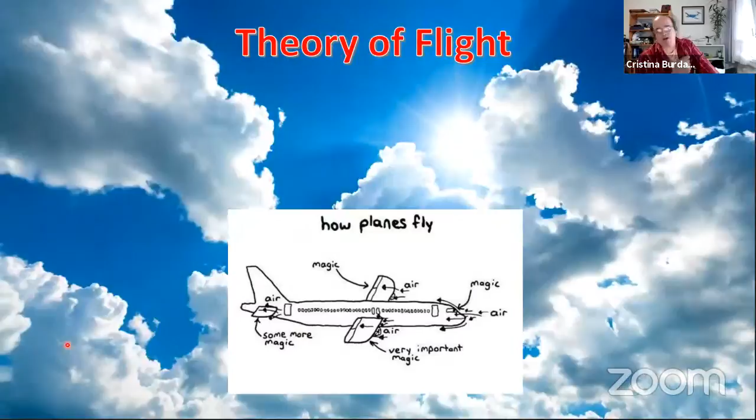Who am I? I work at Pilatus Aircraft Limited. I look after aircraft performance, from design, development, certification to operational support. But I'm obviously just one of many, many engineers.

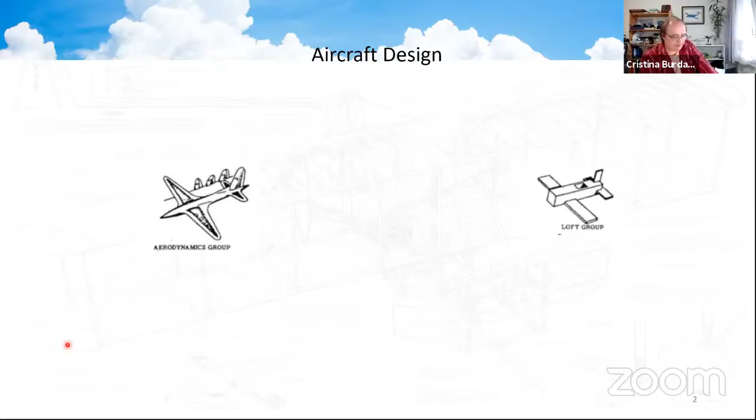In aerodynamics, we love our airplane to be sleek, smooth, rounded, so when it's offered to the air, it gets out the way and lets the airplane through. But when we give our drawings to the design group, they look at what they can draw and produce, and invariably it looks something a little different. When the stress group get involved to make the aircraft nice and strong, they obviously prefer something with iron girders, and you can imagine how this sort of builds up. If they have iron girders, it's all heavy, so we need to get the weight group in there to make things nice and light again. So we keep fighting with various groups - it's a cooperation, it's a very difficult birth. As you can see, the power plant group, they only think about one thing. So airplane design is a compromise.

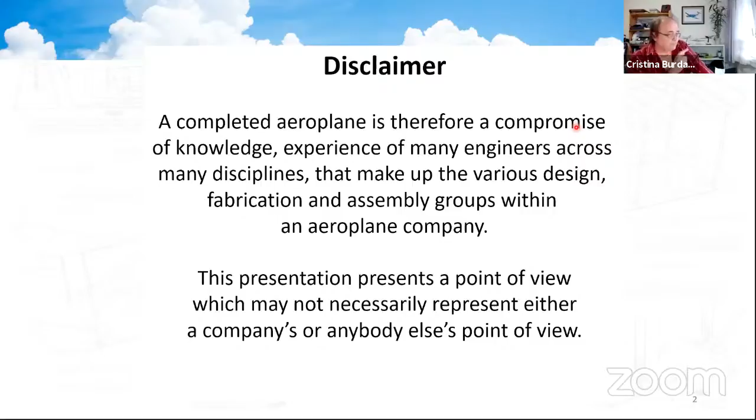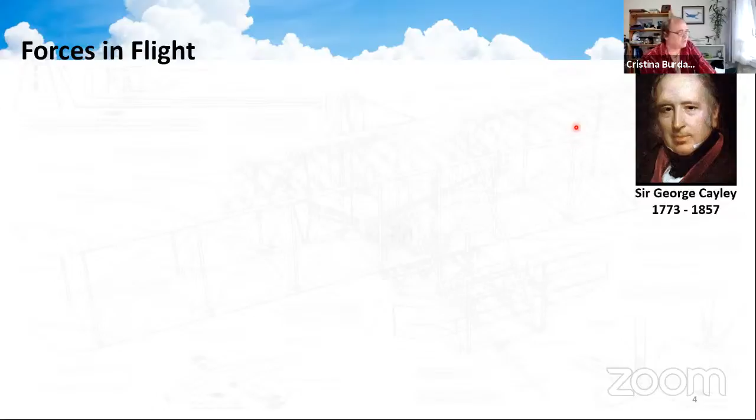So we're going to talk a bit about the science side. Where I'm going to start is on the subject of lift, but I'm going to touch on the historical part by starting on a grassy knoll in Yorkshire, where the landowner, one George Cayley, had been studying aviation for decades. He'd been studying many aspects of aviation, he loved watching birds and how things flew. And when he's about 80 years old, he came out with a design, this governable parachute.

This is circa 1853, in Scarborough, Yorkshire. And he was a bit old to get into this thing, so he volunteered his coachman, one John Appleby. And the reason he did that, at least the story I've heard, is that this glider was going to be pulled by a horse because he wanted to demonstrate the forces of flight. And it actually flew - it flew 900 feet. It crashed.

Mr. Appleby was given basically, this looks like a boat with spoke wheels and a tiller. This is actually the control to try and make this vehicle pitch up, pitch down, go left or go right. But I can imagine it offered him no control whatsoever. It crashed after 900 feet, but John Appleby, the coachman, survived.

By the time George Cayley managed to get over to speak to him, he had a great big grin on his face that this machine actually flew. The story is that John Appleby asked to be relieved of his services because he was actually hired as a coachman, not to fly.

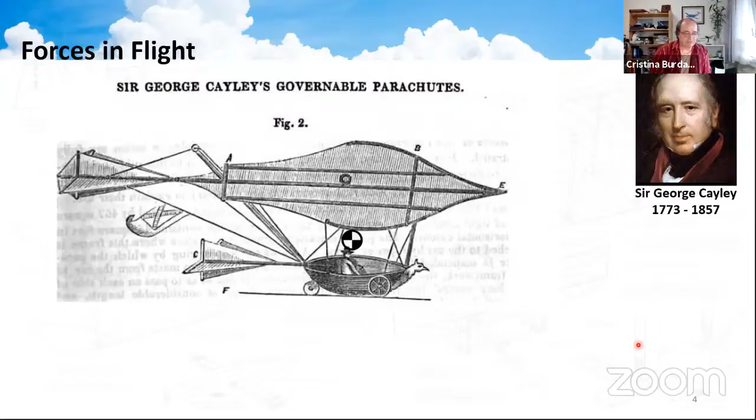Now, this is where the forces of flight come from. George Cayley determined that if the heavier-than-air machine had a center of gravity roughly where the person sits, it must have a weight acting down. Then, from Isaac Newton's theories, applying Newton's third law of motion, to every action must be an equal and opposite reaction, if this vehicle is to fly level, there must be a force called lift acting in the opposite direction.

For the non-physicists, Newton's third law is basically the one that says never kick a door, because a door will kick you back with equal and opposite force. The physicists will understand it as: to every action is an equal and opposite reaction. To generate the lift, the vehicle needed to move forward in the air, and there were some experiments George Cayley did on that, which I'll get to briefly.

But how was he going to do this? He was going to do it by using a galloping horse to drag this thing forward and give it some thrust. But again, applying Newton, there must be a force equal and opposite to that, which he called drag, which would prevent the aircraft from flying faster and faster or slower and slower. It would fly at the same speed.

And these are the forces that we use. This model is basically the core of my work, to tell you the honest truth.

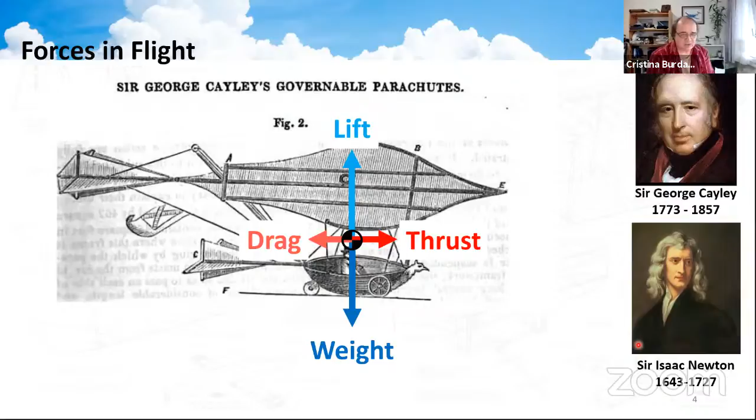Now, you might think this is a flight of fantasy, but now you guys are getting out of lockdown, try going up to the Yorkshire Air Museum, because there is a mock-up of this. It's not the original, because the original finished up in pieces, and they do fetch it out on a nice, fine day. You can read more about George Cayley on the historic-uk.com website.

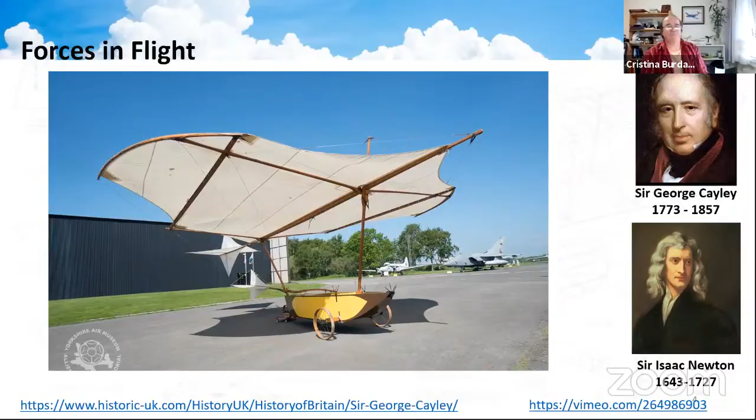So moving on, I want to take these forces and look what happens. If the vehicle took a second person on board, increasing the weight, then the lift must increase as well for the vehicle to stay straight and level.

But the thing you don't see is there is a connection between the lift and the drag. As lift increases, the drag must increase, that's the way it works. But if drag increases, you're going to have to increase the thrust. On an airplane, that means opening the taps, putting in more fuel, or a bigger engine, or both. But all that means is you would actually increase the weight.

And of course, that brings us back to the beginning. So it's a very difficult, very tender relationship. It's a love-hate thing that goes on.

But fortunately, this process is reversible. As your vehicle gets lighter, as you consume fuel, the aircraft will go faster. In fact, you probably have to finish up pulling back the throttle in some cases.

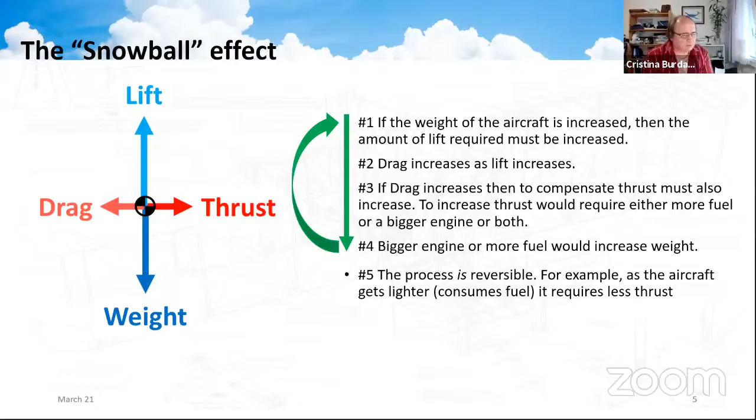Now, that's all okay, that's what lift is. But where does it come from? There are a number of theories I was taught, a number of theories where lift came from.

Now, when I was being taught this, I was thinking, well, how are the molecules connected? Is there a rubber band or something?

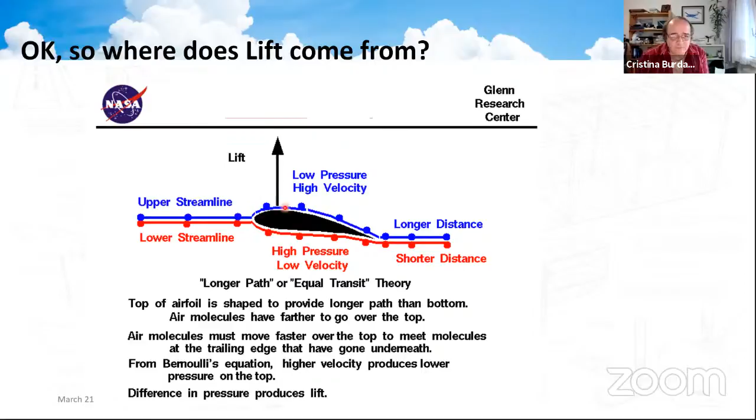This is a theory we were taught: because the air has to go a further distance on the upper surface, it travels with a higher velocity. The Swiss mathematician Daniel Bernoulli, from the very interesting Bernoulli family, realized and worked out that the higher the velocity, the lower the pressure. So on the upper surface you had higher velocity and lower pressure, while on the lower surface you had lower velocity and higher pressure, and the difference between the pressures provided the lift.

It is incorrect. Now why am I telling you this? Because I was forced to learn this at university as if it was gospel. This is incorrect theory number one, and there are several incorrect theories — I learned them all. I even have exam papers on them, and I don't know why I had to learn this.

Let's show you how this is wrong. I'm going to hand over to Professor Holger Babinsky at Cambridge University, who explains this very well.

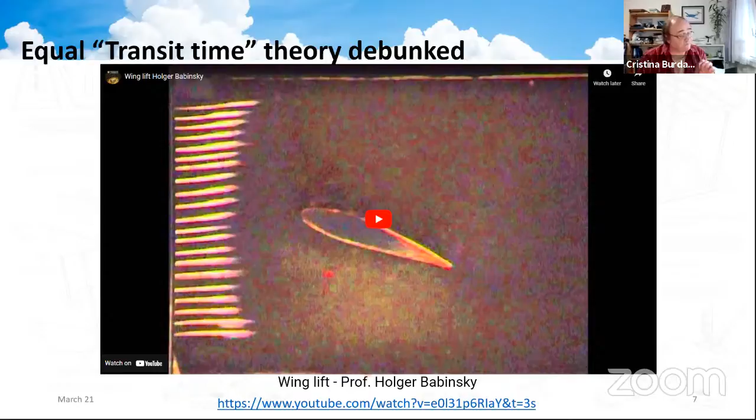It's often said that lift on a wing is generated because the flow moving over the top surface has a longer distance to travel and therefore needs to go faster. This common explanation is actually wrong. This video shows that the air on top does move faster, but it doesn't reach the end of the wing at the same time as the air along the bottom.

Here we use smoke to visualize the streamlines around an airfoil. We can pause the smoke by briefly interrupting the supply. This gives us lines that travel through the flow, as you can see here. If we now slow the video down, you can follow those lines, which gives an idea of how fast the flow is in different parts of the airflow.

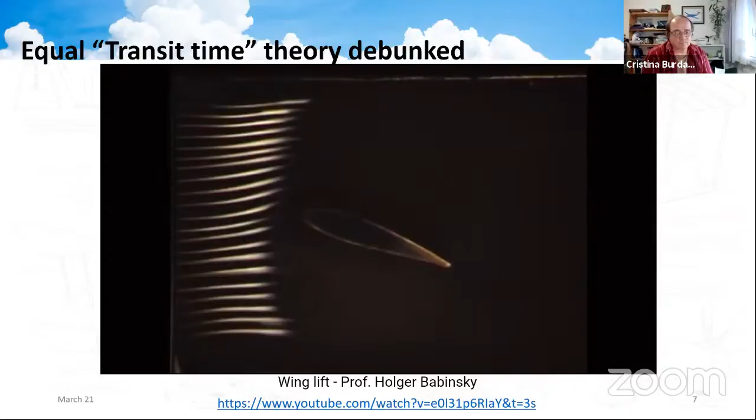You can see it speed up as it approaches the airfoil, moving faster over the top compared to the bottom. It reaches the end on the upper surface much earlier than on the lower surface. In fact, by the time it reaches the end on the lower surface, the flow has already gone a long way past on the upper surface. This shows very clearly that the flow doesn't take the same amount of time to reach the end of the wing.

Okay, so in fact it's even faster than that. That disproves the theory I was showing you before. As I said, these were theories I had to learn instead of learning how lift is really generated. I'm going to attempt to explain to you guys tonight, in about 3 minutes, how lift is generated. And if I fail, trust me, Professor Babinsky has more videos — it'll take about 20 minutes to explain it, but it is worth listening to.

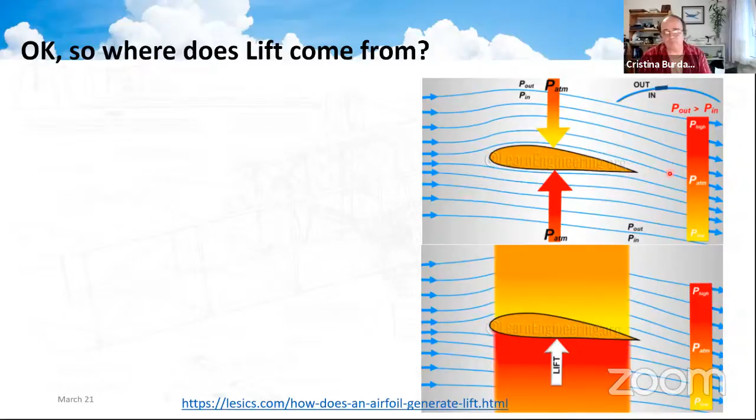If you recall, the flow around the airfoil causes the air — imagine these lines as smoke particles — to bend around the airfoil in a downwards fashion. Now if we look at this closer, as the particle of smoke moves along the arc, the pressure on the outer part of the arc must be greater than on the inner part. If it was the same, the particle would continue in a straight line, according to Newton.

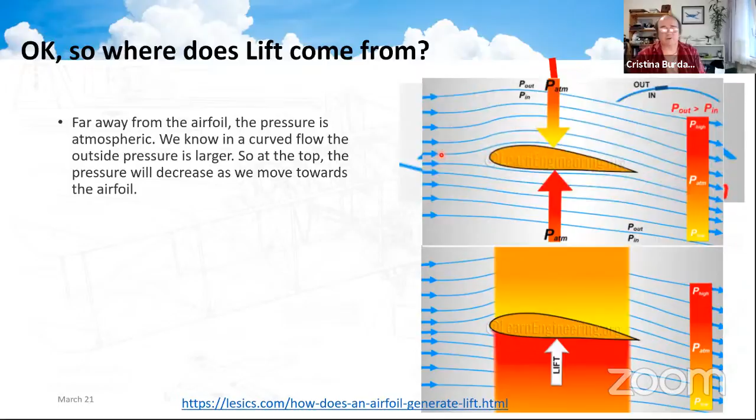And if the pressure on the inside was greater, the particle would actually deflect upwards. So we know the pressure on the outside of that arc must be greater than the pressure on the inside. If we imagine we're far enough away from the airfoil at the top that we're at ambient pressure, then each time we come in closer, we are reducing pressure — this pressure is greater than this pressure, which is greater than this pressure, and so on.

So on the upper surface of the wing, we actually have a lower pressure than atmospheric, and the opposite argument can be made for the lower side — you get a higher pressure than ambient there. So the lift is simply the difference between the pressures on the upper and lower surfaces. The incorrect theory you saw before has the right explanation for the pressure difference, but it arrived at it the wrong way.

And yes, you only get lift if the flow bends. If the flow doesn't bend, the only thing you're getting is drag. The flow will bend based on the speed of the flow and the shape of the objects in the flow, and that, in a nutshell, is where lift comes from.

Okay, so now I think I've given you enough on the physics side with regards to lift and the importance of weights. What I want to do is bring you bang up to date and start talking about emissions, because this is a very topical subject at the moment, and people are making some extraordinary claims, and we're going to be examining some of those claims.

So what are emissions? If you imagine jet fuel as a hydrocarbon, that's basically carbon and hydrogen atoms joined up in the molecule. From fossil fuel, we get a lot of impurities, and one of the main ones is sulfur. In the other end of the engine, we throw in nitrogen and oxygen, basically air. So out the back, you're expecting to see a combustion process which produces carbon dioxide, water, and sulfur dioxide from the impurities. But in fact, what we get are several other things.

We get oxides of nitrogen, oxides of sulfur. We get unburnt fuel - this is hydrocarbon which is unburnt fuel. We get carbon monoxide, and in some cases you can get black carbon, which is soot, but just carbon.

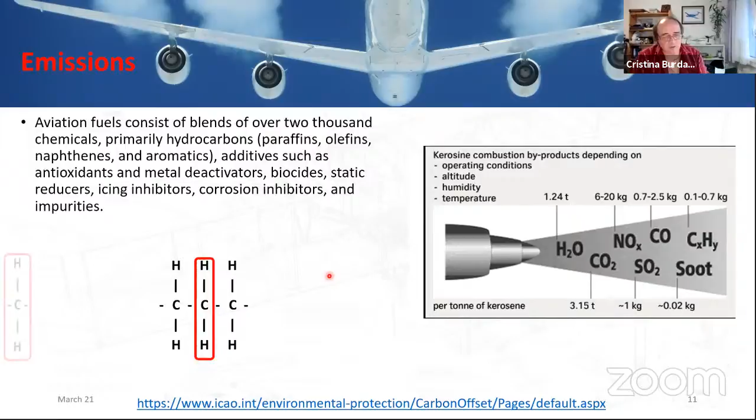I'm going to plonk that segment over there, and we're going to start looking at some molecular weights. So if I look at the hydrocarbon here, CH2, and add up the atomic weights, I'll finish up with 14 units. If I now look at replacing those hydrogen atoms with oxygen atoms, I'll finish up with 44 atomic mass units. And if I divide this 44 by the 14, I'll get 3.14, which is very close to this 3.15 value over here.

I do the same with the water, because the carbon here has the hydrogen detached, oxygen's gone there, and now the hydrogen will attach to oxygen, forming water. And I get similar values again - I get 1.28 compared to 1.24.

Now, anyone who does carbon offsetting will see a figure of 3.16 in the aviation world, maybe 3.15 elsewhere. This figure, 3.16, you multiply by the weight of fuel you are consuming, and that tells you the amount of carbon you need to offset. So if anyone looks into carbon offsetting and sees this number 3.16, it is not a made-up number - it has some chemistry behind it.

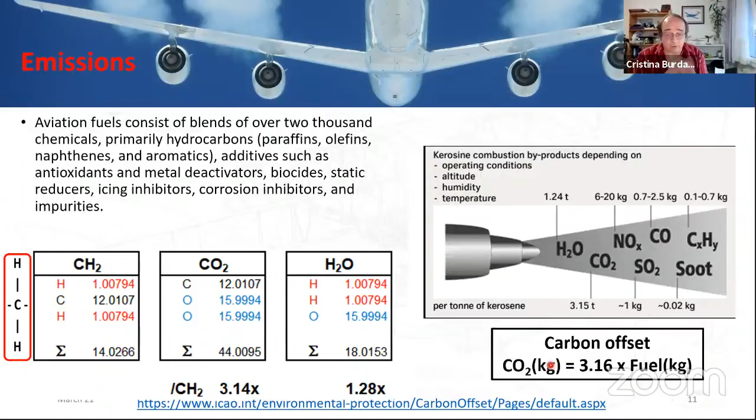I have oversimplified the thing tonight, but it gives you broadly a correct number. There could be some other influences in there - they may have considered adding factors like airports and the concrete involved. I honestly don't know, but 3.16 is the figure used in the aviation world.

Now I want to look at some of the minor emissions first. I say minor in a broad sense because they are things we still need to worry about. One of the other emissions was sulfur oxides - the X can represent 2, 4, whatever number. Sulfur is, as I said before, an impurity within the fossil fuel.

Sulfur dioxide can affect air quality, causing problems breathing. In the air, high up, it can combine with rain and form acid rain, attacking our ecosystems. I remember in my youth you could get sulfur-free fuel, but you had to pay more for it because of the extra process to take it out, and no one bought it. So I think they took it to heart and decided not to offer sulfur-free fuel anymore.

Nitrous oxide - oh, before I carry on, sulfur oxides can occur naturally, but usually only in things like volcanic activity.

Nitrous oxides - where does it come from? Nitrogen is normally quite an inert gas, but once you heat or set fire to something, it gets rather excited and will want to bond, formed by this combustion process. Nitrous oxides have huge influence on our ozone layer. In the upper atmosphere, towards the stratosphere, we want ozone layers because they block ultraviolet radiation.

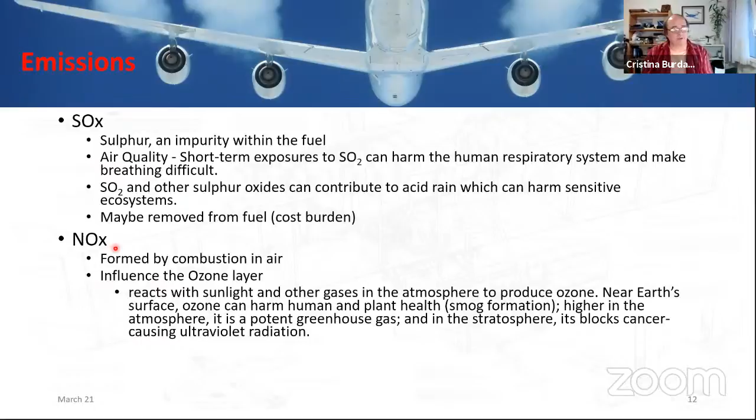The thing about nitrous oxide is it also gets formed naturally, through combustion - so it also gets formed in things like lightning flashes. Maybe Simon, our weather chap, can talk about this a little later. As far as I can tell, there's more than 1 billion lightning flashes across the planet in any given year, and you can see a lot of activity in various places. So a lot of nitrous oxide gets formed in the atmosphere naturally, but we are concerned about it as an output - it's one of the things we're heavily trying to avoid putting out in the aviation industry.

So approximately 2.4% of the carbon dioxide goes out into the atmosphere from transport related to aviation. I'm only talking about carbon dioxide mass - I'm not saying if you release it here it should be counted more significant, just basic mass at the moment. So about 2.4% of emissions comes from the aviation sector.

And what is sadly misunderstood is when you look at business aviation, it's only about 2% of civil aviation. So when people get upset about business aviation, they're actually getting upset about a figure of less than 0.05% of global CO2. Frankly, I think there are some bigger things that need to be addressed. But I do have a biased opinion because I work in business aviation.

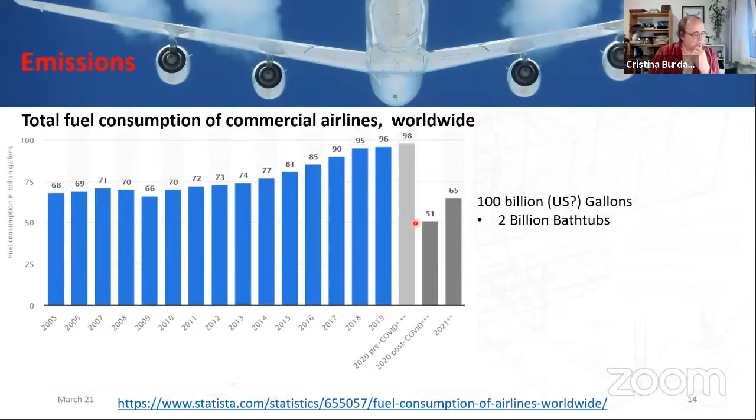I want to focus on the 100 billion gallons. What does 100 billion US gallons look like? Well, that's 2 billion bathtubs, but that's still too big a number for me. What else could that look like? Over 151,000 Olympic-sized swimming pools. Hounsdale doesn't have an Olympic-sized swimming pool. What else does that look like? 86 Chasewater reservoirs going up every year, or six and a bit Lake Vyrnwys.

Now, if you accept what I was saying before, that aviation is 2.4% of global CO2, then what we're putting into the planet is 3,585 Chasewater reservoirs worth of fuel, or 264 Lake Vyrnwys. So when people argue to me, oh, how arrogant is man that they think they can influence the climate, I struggle, because I don't see how we can't be affecting the climate. And remember, this is one year's worth of carbon dioxide we're pumping out. We've been filling the planet since the Industrial Revolution, 250 years ago. And yeah, it's huge. So what are we going to be doing about it?

Okay, so I want to introduce you to an organization called ICAO, the International Civil Aviation Organization. They are the United Nations of the aviation world. They set out global policies, global mandates, and each local authority, like in the UK you have the Civil Aviation Authority, and in Switzerland we have the Bundesamt für Zivilluftfahrt, or BAZL, each body can define higher standards than what is defined at international level, should they so desire.

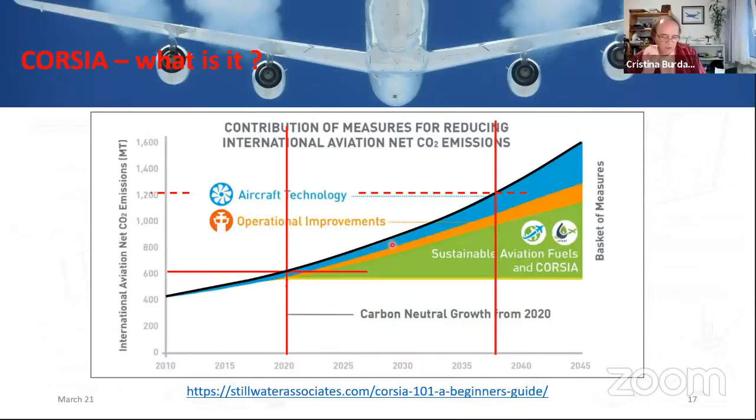Well, what the aviation sector said was they want to do carbon neutral growth. How are they going to achieve carbon neutral growth? They're going to use a basket of measures. In that basket of measures, we've got aircraft technology. We're going to be trying to make the aircraft lighter, you saw the importance of weight earlier. We're going to be trying to improve engines. As you saw, we have unburnt fuel that's managing to get through the system. We're going to try and improve how the fuel is consumed. We're going to try and make the aircraft cleaner.

So aircraft technology, we're hitting this every time. We're always trying to improve, but we were always trying to anyhow. But now we have more emphasis. And if you go back to the disclaimer I had at the beginning, where we have this set theory where we could put all the engineering teams in, what happened was on the right we had the loft group, production group. If you want to make your airplane cheaper, you push the scale that way. But if you want to make your aircraft more efficient, you push it back the other way towards me, in aerodynamics. That's one part of our basket of measures. Operational improvements.

I don't know if you remember, but there used to be a time when you'd be in the airplane waiting to take off, and when you arrived at your destination you could be put in a hold. That doesn't happen anymore. Now when you go to take off, there's only 2 or 3 airplanes in front of you, not 10 or 20 like there used to be. You can only take off if you've got clearance to land, so you don't hold at the destination anymore.

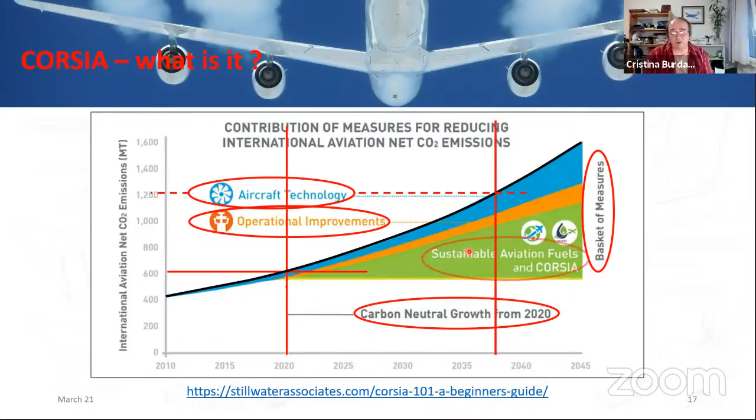But there's another quite interesting way of getting sustainable fuel. Let's listen to what's going on here, because this is the source of where this presentation started.

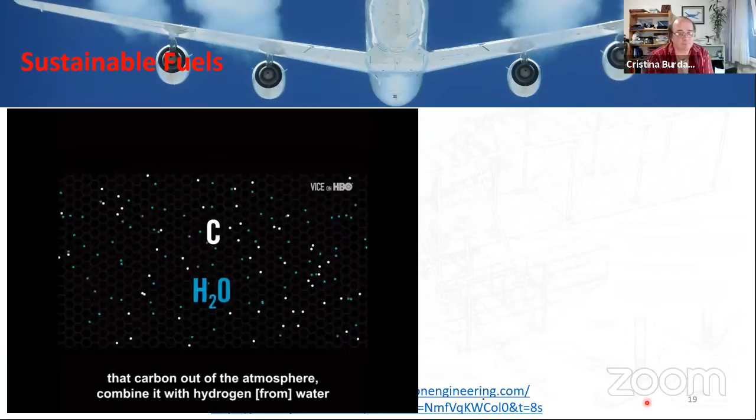Why don't we recycle energy? You're hitting the nail on the head. We would like people to be recycling their fuel in the same way as they recycle other things. Our technology refines that energy, that carbon out of the atmosphere, and combines it with hydrogen from water. And then that's the same as gas or jet fuel? Yeah, it's chemically the same, no pollutants. For example, our diesel burns completely clean, none of that black smoke you see from trucks going up hills. Completely clean, but yeah, it's chemically identical.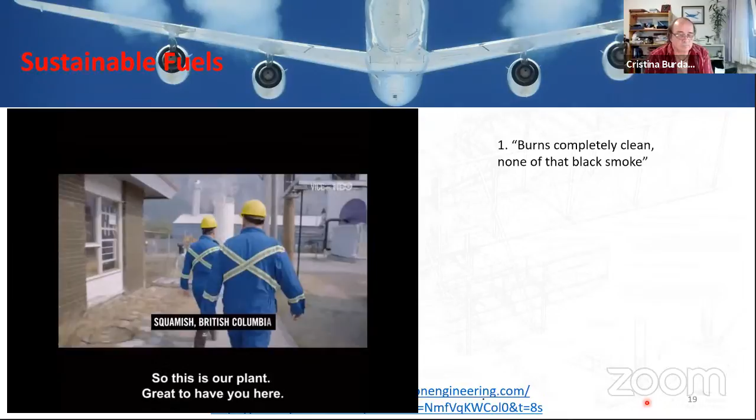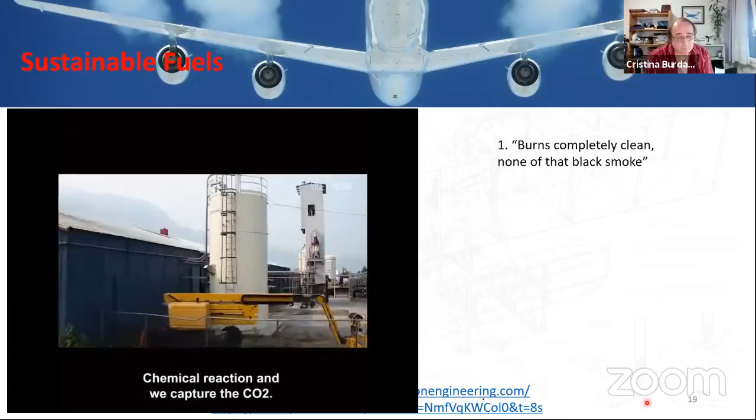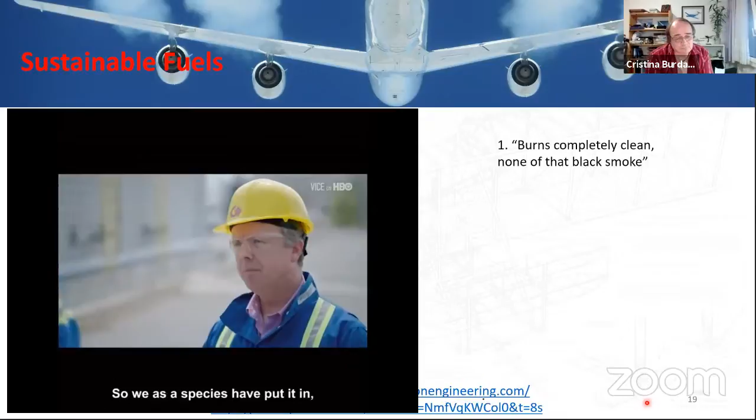So this is our plant. Great to have you here. Everything here is a working model, full process working, and we're capturing CO2 from the atmosphere right here. Think of it as a big cooling tower - a large fan draws the CO2 in, there's a chemical reaction, and we capture the CO2. Wouldn't there be more carbon to capture near dirty, naughty factories? No, it's uniformly distributed. We could put one of these plants in the middle of Beijing, or we could put it in the middle of the Sahara Desert - you'd capture the same amount of atmospheric CO2. So we as a species put it in, so we as a species should be taking it out. Well, that's our choice, but I think we have to, or find somewhere else to live.

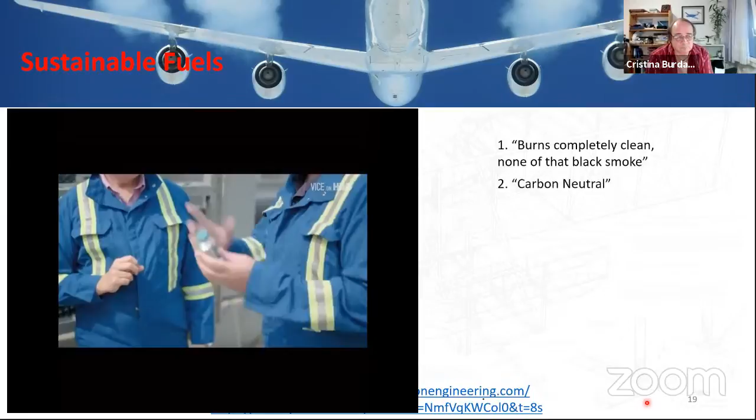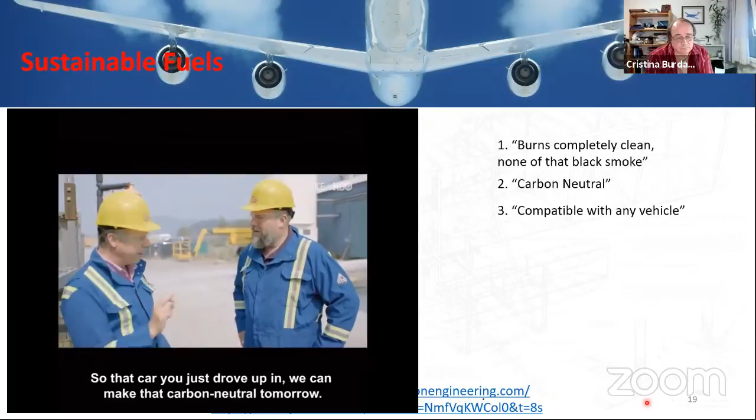This is the fuel that we make. It looks exactly the same as any other fuel. It's very, very high chemical performance - higher performance than the stuff you buy at the pumps today. So it's better than the pumps, it's carbon neutral, and theoretically it would be cheap to make because you're refining the energy that's already out there in the atmosphere. Yeah, you're using the CO2 from the atmosphere. Your only feedstock, the only thing you're consuming, is renewable electricity. But here's the interesting thing - a carbon neutral fuel that's compatible with any vehicle in the world today. So that car you just drove up in, we can make that carbon neutral tomorrow.

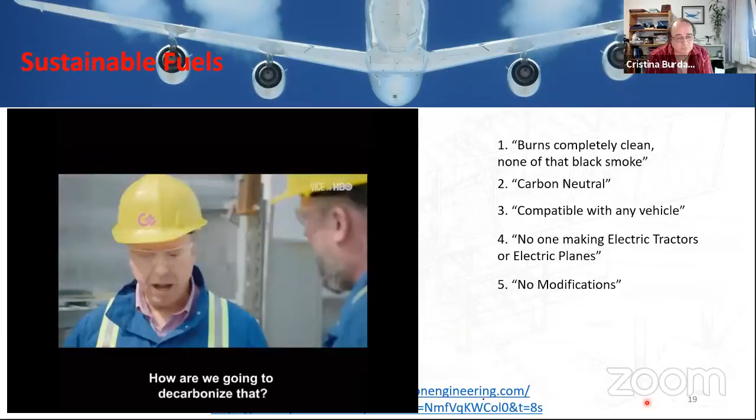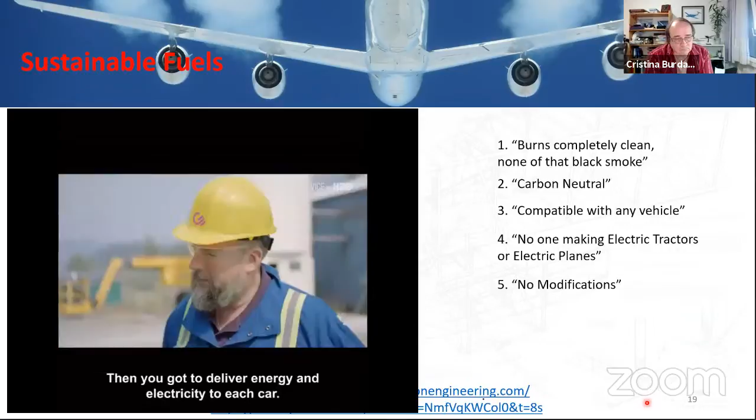Any vehicle, any performance vehicle, any battered old truck, aeroplanes - we're compatible with all of those. Which is significant, because nobody's making electric tractors or electric planes. Do you have to do any modifications? No. Transportation is about 20% of CO2 emissions - how are we going to decarbonize that? There's 1 billion cars in the world, so if we all go electric at $50,000 per car, that's $50 trillion, and then you've got to deliver energy and electricity to each car. It's a massive change. Alternatively, why don't we just change the fuel? The price to you at the pump will be the same.

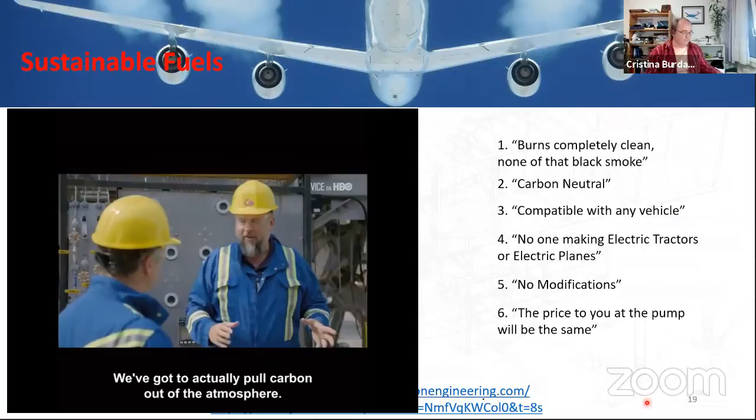Having something like a carbon neutral gas isn't even enough - we've got to start going negative, we've got to actually pull carbon out of the atmosphere. Now, can this do that? And what's the plan there?

Take the CO2 generated here and bury that underground, and you get to negative emissions. Right, it's a hugely important thing.

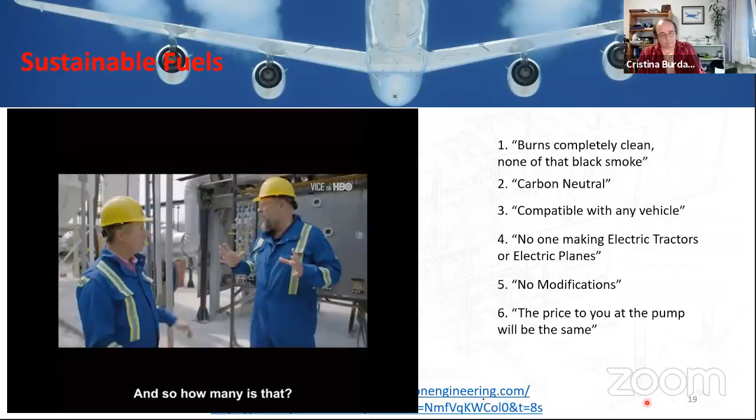How many do you need to scale it to get to carbon negative? You need less of these than there are power stations in the world today to net emissions out to zero. And how many is that? It's in the region of tens of thousands. If we are taking measures as we should be to remove emissions elsewhere, now you start getting to an overall negative emissions from the world.

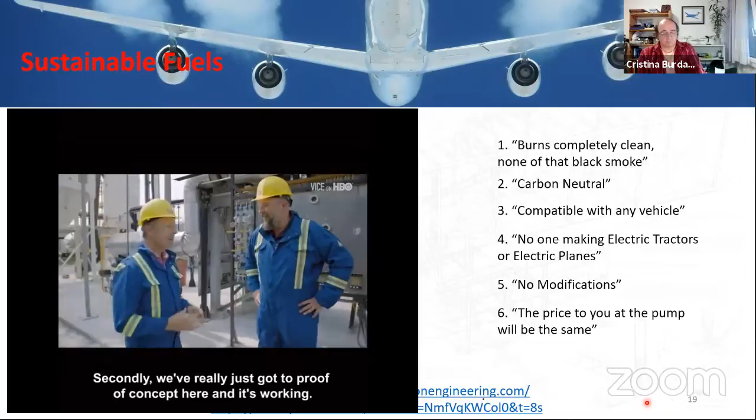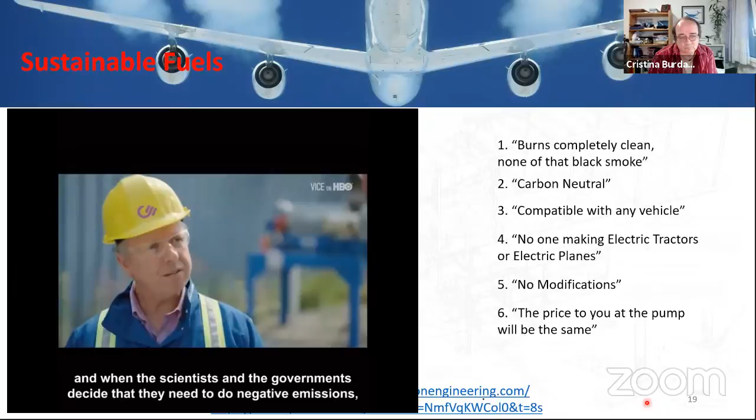Why isn't the world rushing to Squamish, BC and saying, can we please make 100,000 of these? So first of all, we're open and ready to receive the world. Secondly, we've really just got proof of concept here, and it's working. So the next step for our business is to expand across the globe, make carbon neutral fuel, and when the scientists and the governments decide that they need to do negative emissions, the technology is ready.

Okay, so that all sounds really quite exciting, and I picked up on a few things I'd like to discuss. So let's go through some of these things.

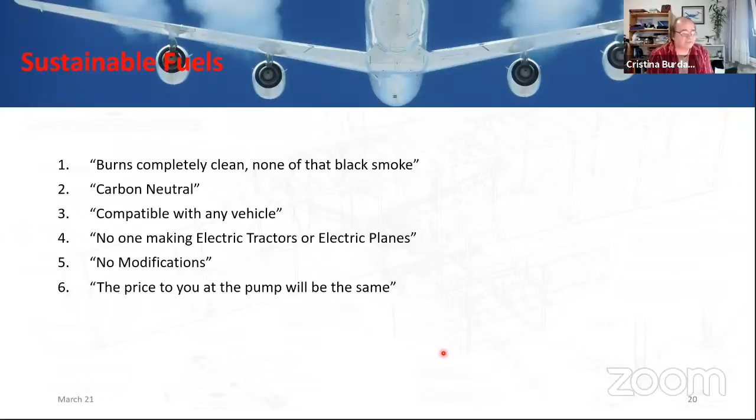Burns completely clean - well, if I remember right, normally if a truck's burning black smoke, it's usually that the fuel is not burned properly or it's injector performance. This fuel will not solve fuel injector issues. It will burn differently, so it may not be as black, and it hasn't got in this fuel the impurities we have in fossil fuel.

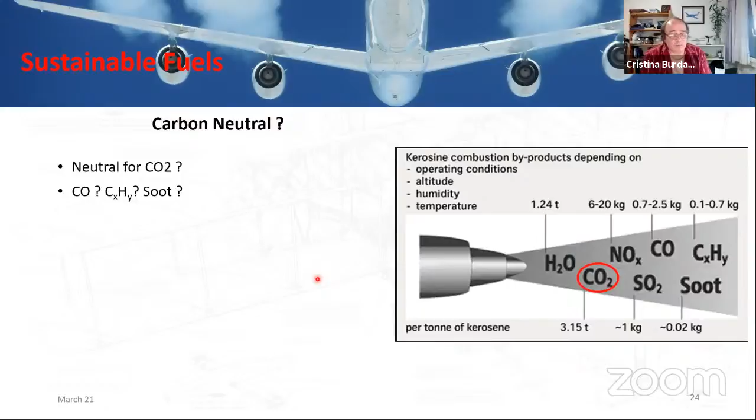Carbon neutral - well, neutral for carbon dioxide, yes. But if you remember, we had other carbon sources - we had carbon monoxide, unburned fuel, and soot. So he's neutral for CO2, and CO2 is the biggest contributor. The other ones are less so, considerably less so. But again, if he wants to claim carbon neutral, I'm a little hazy because there's bits and pieces of other carbon which aren't being taken out.

Compatible with any vehicle, as long as it meets the fuel standards of that vehicle - absolutely. And here I'm in full agreement with what it's doing.

No one makes electric tractors or electric planes - well, that's an interesting one. Electric tractors, you can buy them today, you don't even need to sit in them. I don't know when these tractors were available, and I don't know when Steve made his claim, but there are electric tractors out there doing some fantastic stuff.

Electric planes, that's an interesting one. So let's have a look at electric planes - I'll get to the chart in a moment, but let's have a look what we've got. This is from Zunum. They had investment money from Boeing, but Boeing have run into trouble and pulled the plug. Zunum, at the moment, I don't know where they're going, what they're doing, and so that project at the moment is on pause.

This project over here, Alice, is an Israeli product. They had an unfortunate incident with their first prototype - no one was hurt - and the second prototype, I believe, is either about to fly or is flying. They're pushing ahead, it's looking interesting, but as an aerodynamicist, I do worry about the position of some of their engines.

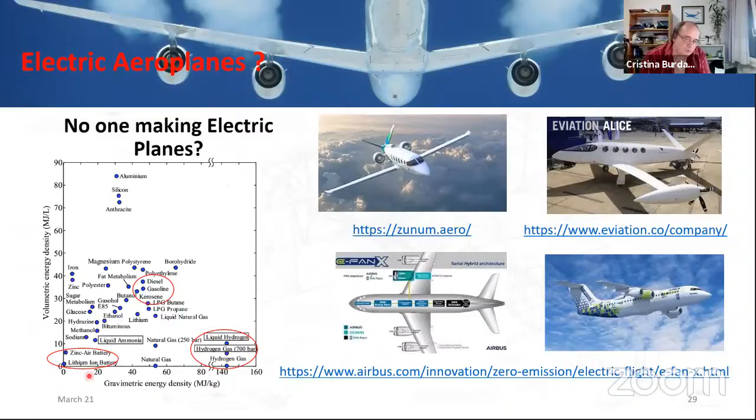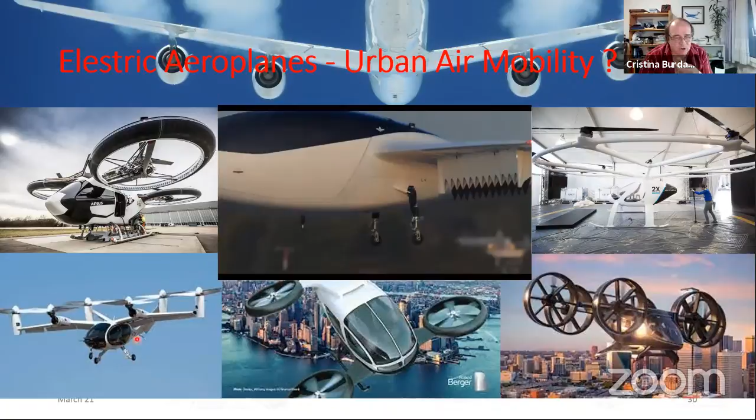And the thing is, there's quite a proliferation of these. There's actually more than 10, so it's probably approaching about 100 different designs of urban air mobility, and they're all working with electricity. But when you get to your destination, what are you going to do? Are you going to wait the next day to charge the batteries? Are you going to swap the batteries out?

It doesn't, to me, make sense as a business case. The air vehicle needs to be out there working as much as possible to earn its keep. So when it comes to electric aeroplanes, I have to agree 100% with the claim that Steve made. No one's making it work. They're trying, but it's not working.

Electric tractors, no, they're there. No modifications to your vehicle, absolutely. And this is like the Holy Grail. It's a drop-in, you may hear the term drop-in solution. And then the price at the pump needs to be the same.

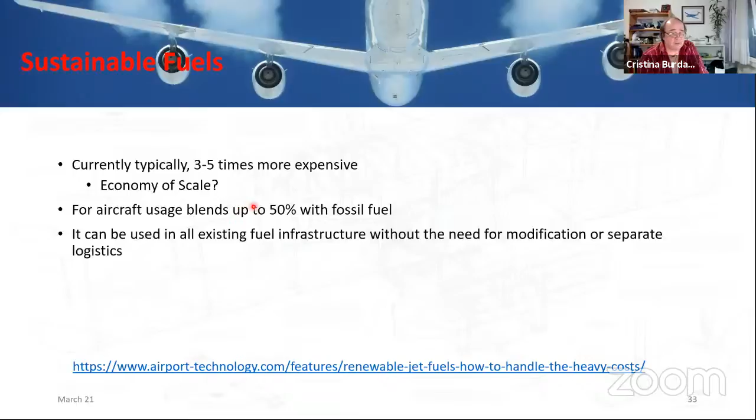Well, this isn't Steve's direct air capture, this is using the biostock. But currently they're 3 to 5 times more expensive. And we do blend them, which will help bring the price down a little bit. But at the moment, sustainable aviation fuel is not a big thing. It may come down with economy of scale.

There's companies such as Gulfstream who have been operating for over 3 years. They've done 550 flights, flown 1 million miles on sustainable aviation fuel. We need to prove that the fuel is not eating the tank, it's not eating the fuel system, it's not eating the engine, that it works. So we need to get a degree of reliability measurements into this.

So that's my take on what Steve's been talking about. The interesting thing on direct air capture, though, is he will go to, or can take air carbon dioxide out of the atmosphere and bury it.

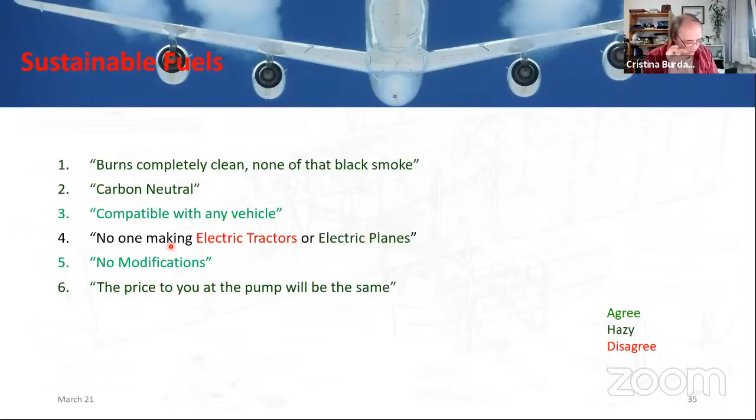Now, ICAO, the other thing after sustainable aviation fuels was CORSIA. CORSIA is Carbon Offsetting and Reduction Scheme for International Aviation. It's in the pilot phase at the moment, and will probably be introduced in the next 3 to 4 years. This means carbon credits, and carbon credits can be things like green projects, whether you invest into sustainable forest management, reclaim forestry, or invest into renewable energy projects.

So there will be carbon markets, and you'll be encouraged to invest in them. However, there is no managed, monitored, accredited system today.

And in 2007, some chap in Hungary, well, I don't know where he was, not necessarily in Hungary, offered carbon offsetting for the Vatican in 2007. And he gave them a certificate. But the forest he said he was going to reclaim, which was in Hungary, never happened. And you can imagine how happy the Vatican are about that. The Vatican weren't paying anything. This guy was just trying to get them on board to then advertise he's got God on his side.

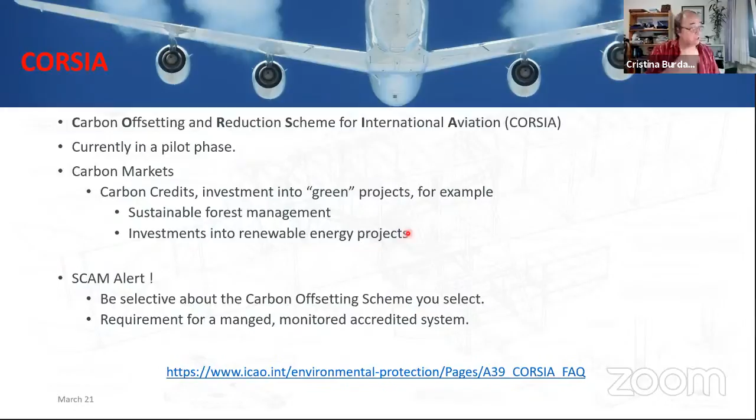Now, batteries, what alternative energy sources can we have apart from the fuel? We talked about batteries.

There's been demonstration flights around the planet. Here is a small aircraft that is certified and flying on batteries. In fact, it flies for about 15 minutes, including reserves.

That's fantastic, but for larger scale aircraft it doesn't work because batteries just do not have the energy that we need. It's about 40 times less than jet fuel. And then what are you going to do? Normally the airplane gets turned around within the next hour or so for the return trip. You can't lose time charging batteries, and you probably don't want to swap out the batteries.

The technology isn't there today, but that doesn't mean the technology won't be there tomorrow. I do know they're working on, I believe it's called sulfur iron, which is a promising step forward. But they've got to do more than an order of magnitude improvement, and it's a hell of an ask.

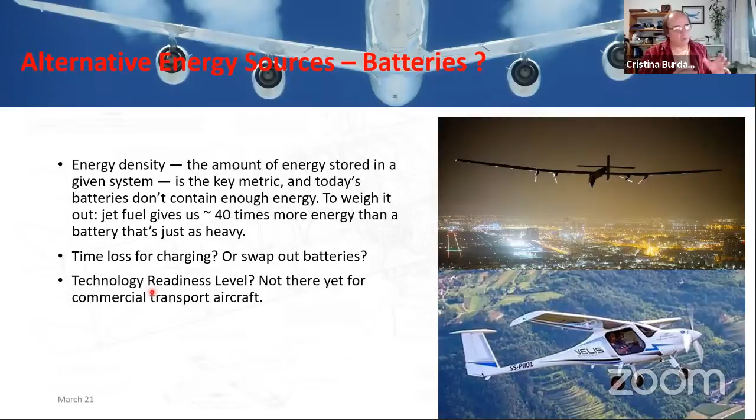So if we can't do batteries, if we can't store electricity on board, what about if we create electricity on board? Fuel cells. In fact, there's been a couple of fuel cell aircraft already. Boeing Phantom Works have created an aircraft which they flew a few times, and recently in Cranfield, Zero Avia have been testing their aircraft.

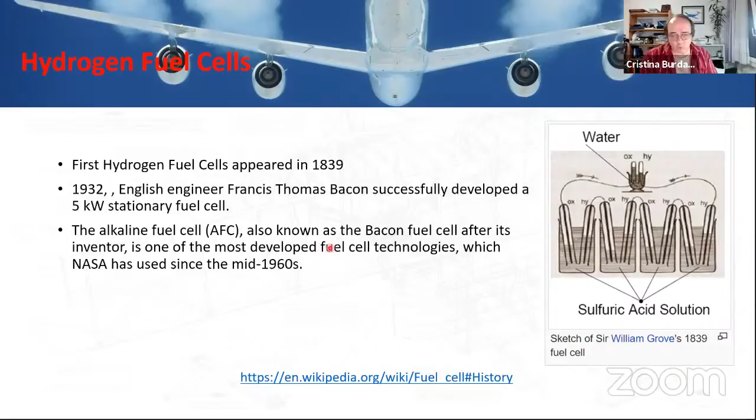Hydrogen fuel cells have been around a long time, since 1839. In fact, hydrogen fuel cells in the 60s have been to the moon and back. So it's not a new technology, but to get the energy out for the weight that they will be is a difficult thing. How do hydrogen fuel cells work? There's a very short presentation on that.

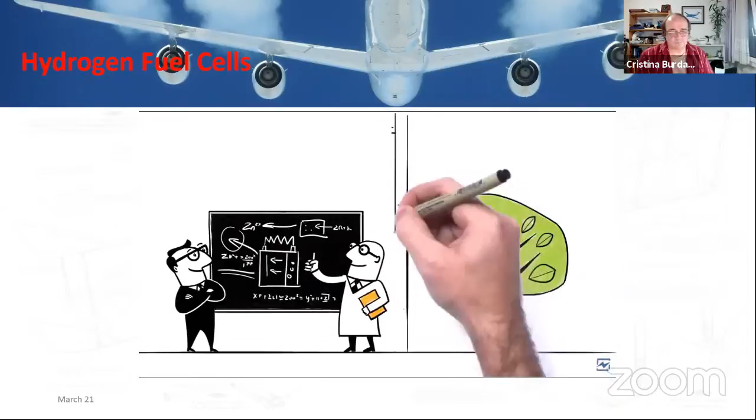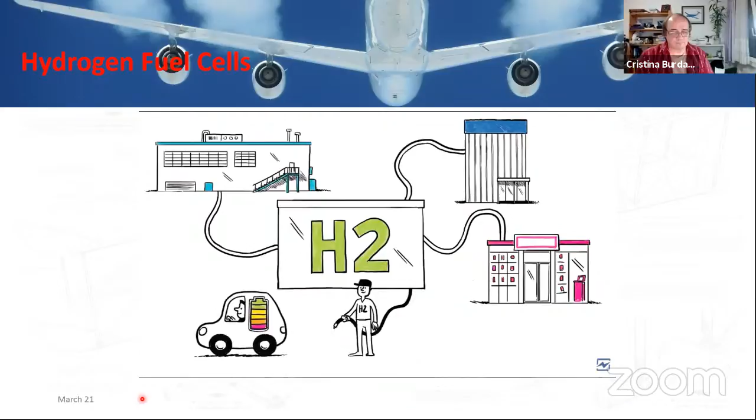Have you heard about the new sustainable energy technology called fuel cells? In fact, they're really not that new. Fuel cells were invented in 1839 by William Grove, and were developed by Pratt & Whitney and other companies in the 1950s. Safe and dependable, they were used by NASA and the Russian space program to power spacecraft. Today, leading global companies like Apple, Verizon, and Coca-Cola use fuel cells to generate clean power. Honda, Toyota, and other car companies use them to power their new generation of pollution-free cars. So how do fuel cells work? Fuel cells use hydrogen and oxygen in a chemical process to produce electricity and heat. The only byproduct: pure, clean water.

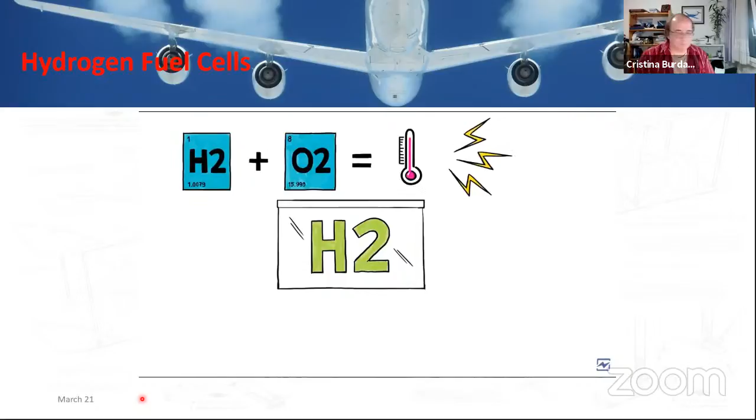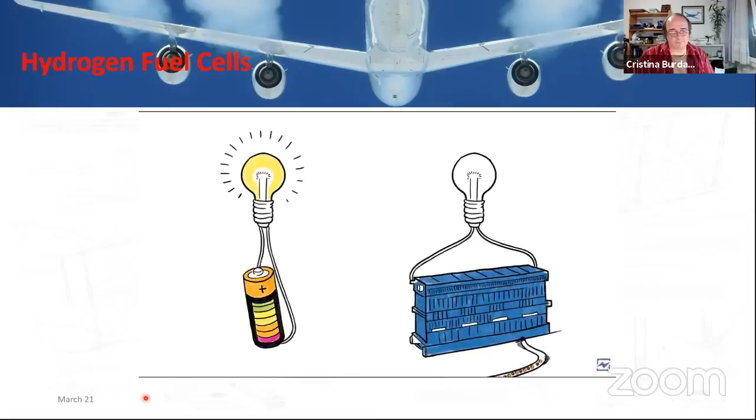A fuel cell has two electrodes, an anode and a cathode, and between them an electrolyte. The catalyst on the electrode breaks the H2 hydrogen molecules to allow them to combine with hydroxide, OH negative ions, to create water and release electricity. But unlike batteries, fuel cells don't store power for a limited amount of time. They generate it for as long as you have hydrogen.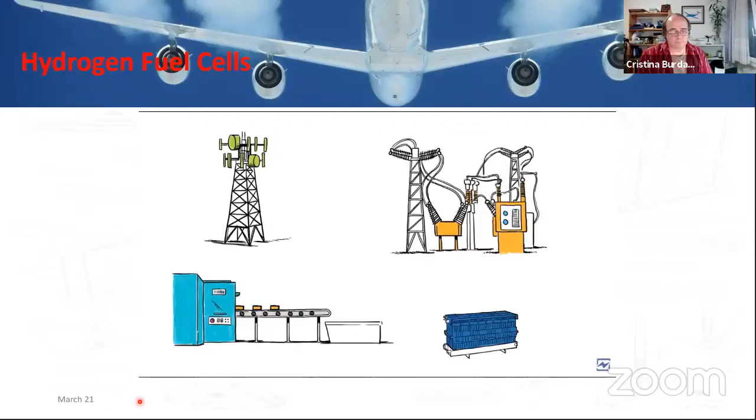As a source of backup power, fuel cells are much better than diesel generators. They aren't smelly or noisy, and they don't produce harmful exhaust. Fuel cells can be used anywhere you need backup power: mobile phone towers, electrical substations, manufacturing, and much, much more. Other green power solutions harness the sun or wind, but if you're caught up in a cloudy day or on days where the air stands still, these solutions can leave you without enough power when you actually need it.

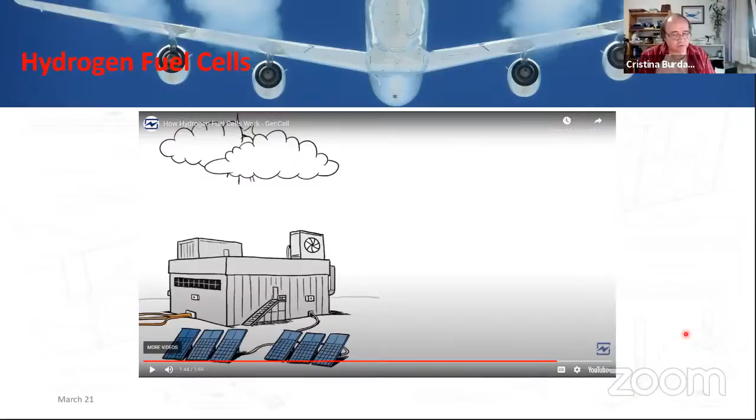That's why you... I'll pause there. He's about to advertise GenCell, but I know my time's running out on me. So that explains briefly how hydrogen fuel cells work.

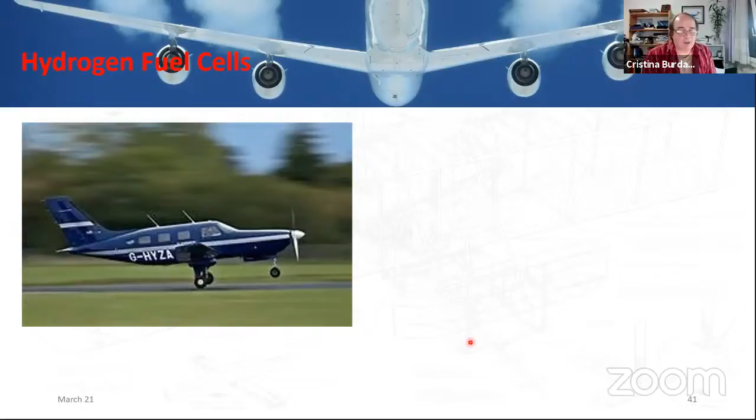And as I say, there's an aircraft that's been flying, and it's actually now starting to look at a nice sized aeroplane, a business class aircraft, with 250 kilowatts of total power, about 300 horsepower, just over 300 horsepower. And it's flying down in Cranfield, or I should say, was flying down in Cranfield.

Just less than a month ago, they made a statement that their aircraft made a safe off-airport landing in a field just outside of the Bedfordshire airport. I'm not too sure normally what I would expect to see, but this is what a safe off-airport landing looks like.

The crew were absolutely fine. They were battered, but they walked away from this. The hydrogen was secured — you can see there's no burning or anything there. It may have been to the moon and back, but apparently it can't do a lap of Cranfield Airport.

Fortunately, these guys aren't deterred, and they are going to push on with the next aeroplane, because they had a family of airplanes they're going to work along. I look forward to seeing the work from ZeroAvia on this project.

That said, I do love the understatement said there. Recently SpaceX lost Starship serial number 10 on the pad. It landed, and after a few moments, it exploded. But of course, SpaceX won't say it exploded - they claimed it underwent a rapid, unscheduled disassembly. And they do mean rapid. I love my business because we actually do enjoy understatements.

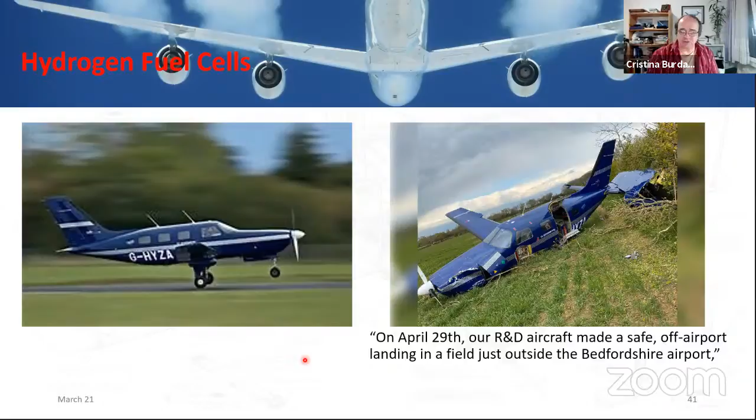So, okay, what about hydrogen itself? This is why Airbus have stopped doing, or abandoned, their EFAN X program, the electric airplane we're looking at. And Pipistrel, who made that other airplane I showed you earlier, which is already certified as a battery-powered airplane, are looking to get into this market.

Hydrogen has already been tried, back in the 1950s. This, though it says it's a B-57, any aviation buffs out there will realise it's an English Electric Canberra. What they did was make no modifications to the engine, but they shut down that engine and fed it hydrogen, which they did. They had some problems at first, but eventually got it to work. The one engine running on jet fuel produced no contrails, no condensation trail behind the airplane, while the one working with hydrogen produced an enormous, dense and persistent condensation trail. And if you're in the military and you're announcing your arrival like that, who needs radar?

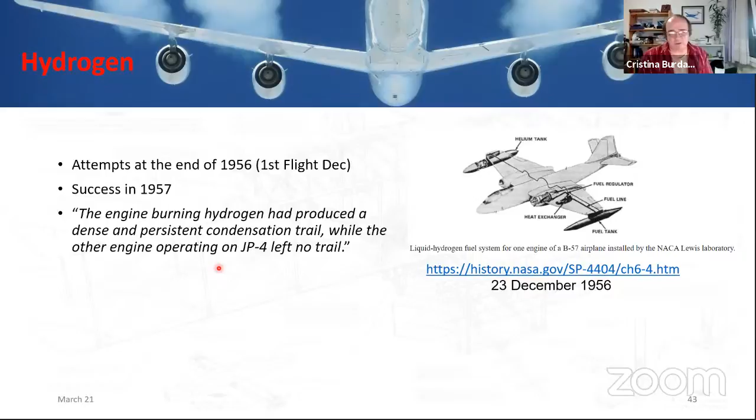So the project got shelved quite early. The Russians actually looked at it too in a passenger aircraft, but that was back in the 70s, I think. I must admit I don't remember exactly what happened there and why they abandoned it.

What's so special about hydrogen? I've pinched this from an Airbus presentation from 1999, and we're looking at liquid hydrogen. For the same energy content, for the same energy by weight, I need 3 times less liquid hydrogen. But by volume, I need 4 times more liquid hydrogen than jet fuel, and I need to find somewhere to put it on the airplane. And we're talking liquid hydrogen, so I've got to put it at minus 253 degrees centigrade.

Bit of a challenge. Again, let's see what happens with an identical energy content. You're burning 1 kilo of kerosene, and you remember these numbers from before: 1.2 and a bit kilos of water, 3 and a bit kilos of carbon dioxide. For the same energy, you only need 0.36 kilos of hydrogen. There's no carbon dioxide output, there's no soot output, but we're producing 2.5 times more water, and because hydrogen burns hotter than kerosene, we're going to be producing more nitrogen oxides. And that is of concern in this business.

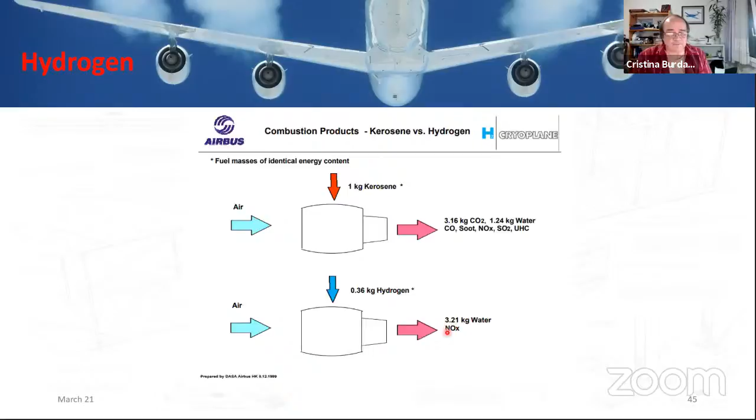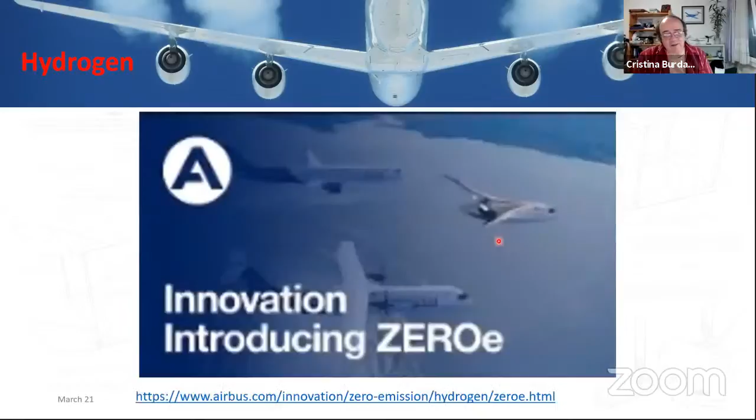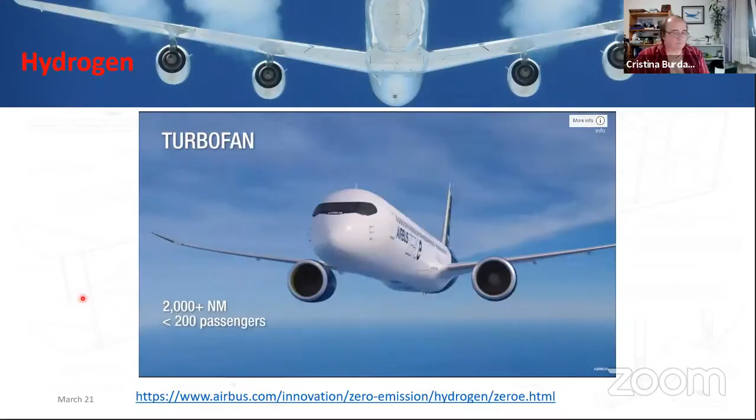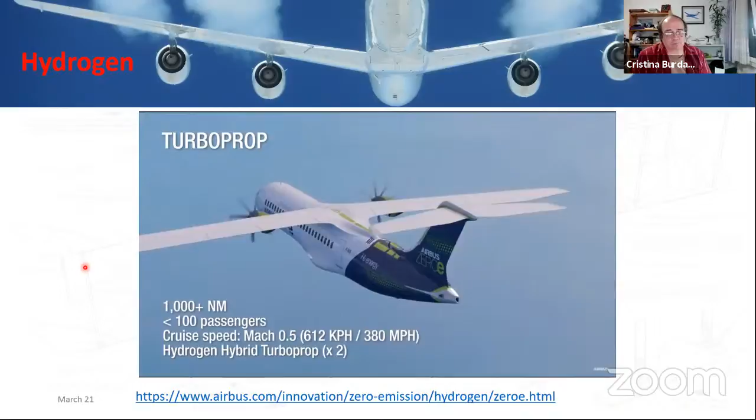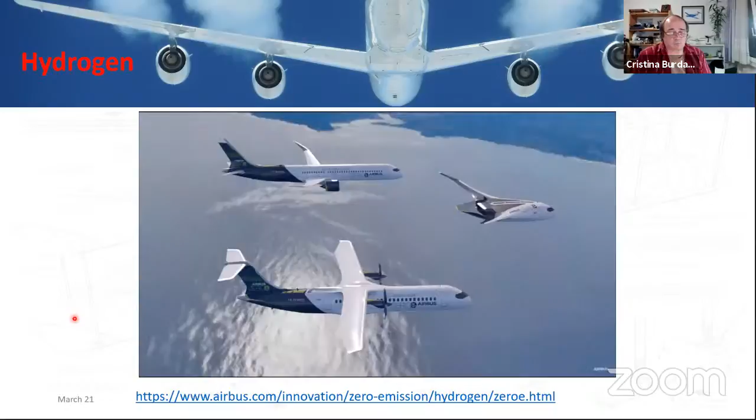Let's have a look at what Airbus think today. Airbus are now saying we can do hydrogen, or we pursue hydrogen aircraft. It's a hydrogen hybrid - what that means exactly, I don't know. They're going to be mixing the hydrogen with other alternative sources, maybe hydrogen fuel cells and so on. But in that presentation, they talked about ranges of 1,000 plus and 2,000 plus nautical miles.

You still can't get to places like Dubai, not that I've ever been, and you're certainly not getting to places like Australia. These are the kind of ranges they're talking about with these aircraft.

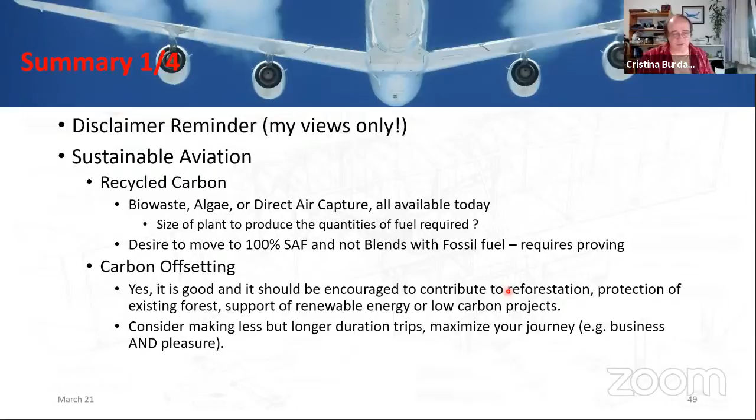Hydrogen, we looked at hydrogen. The problem with hydrogen is the nitrous oxides. Maybe that could be offset by burning in oxygen instead of air, because you're getting the oxygen from the hydrolysis, and then you're not burning it in air and not getting the nitrous oxide. But then you're going to be carrying more oxygen bottles and it's all weight issues. I just don't see it working. I don't know how they're going to solve the nitrous oxide issues. Plus hydrogen contrails have about 2.5 times more water.

Clouds and global warming - maybe Simon can say something about this a little later. Clouds, they can trap the heat and warm - this is one thing we all know about. But we also know they can provide cooling to the planet. It's a love-hate relationship with clouds and contrails.

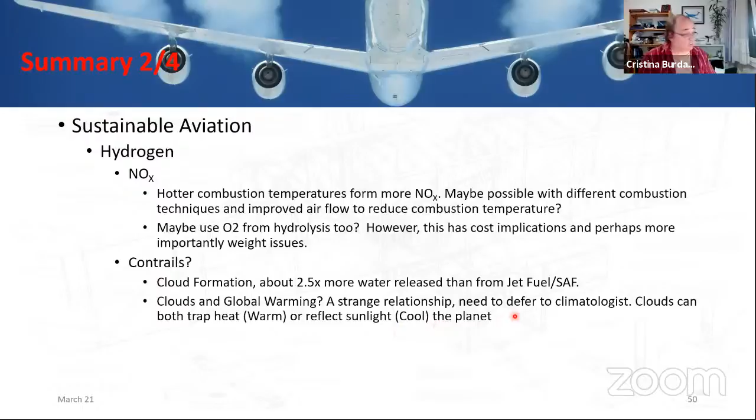And you've seen the range implications earlier, so batteries alone, we know just doesn't work. Maybe for small aircraft, like Simon flies around in at Halfpenny Green or whatever it's called these days, going to the business airport - fuel cells and batteries for larger general aviation aircraft, that's something I think may come, and I hope ZeroAvia pick themselves up and crack on with it.

But whichever path is pursued, expect costs to fluctuate. When CORSIA comes in, airlines are going to have to offset their carbon, whether they do this by buying sustainable aviation fuel or buying carbon credits on your behalf - your ticket prices are going to go up. With hydrogen, you would have longer trips or stopovers, but maybe a tactic should be used: liquid hydrogen for shorter trips and sustainable aviation fuel for longer trips.

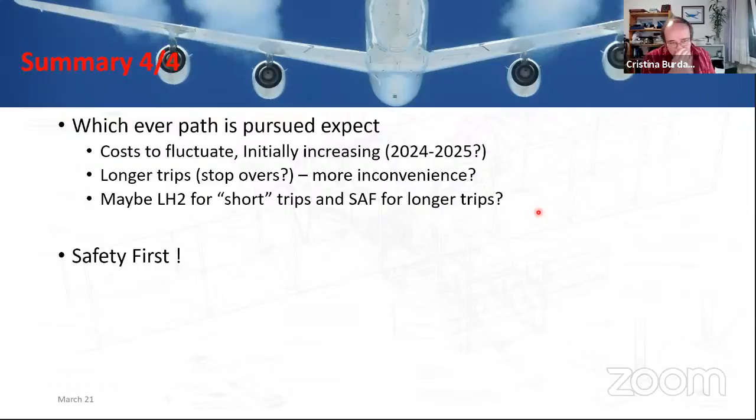But importantly, we can't do this in a rush. We're a safety-first industry, and it's not something we can take lightly. So it's not something we can change the world with straight away. No, you've got to do this right. It doesn't work that way. It's got to be proven. And I'm sorry, I've taken too much time, Simon - it's back to you.

Thanks, Eddie, that was absolutely fascinating - no problem with the time at all, could have listened on and on to that. Fascinating, and I think you've given us a whirlwind tour of aviation and where it's going in the future, and the considerations we all need to have. Certainly lots of interesting points made, and lots to ponder for the future.

If anybody's got any questions, please post them in the chat, either on YouTube or in Zoom. We've got one coming from Ian Sadler, asking what you make of the claim that the Wright brothers weren't really the first to fly - the launch ramps they used means they were aided, and the first real unaided flight was by Santos Dumont in France. Interested to know what you think, particularly given what you said about George Cayley and how that fits in with things. So what do you think of that, Eddie?

I'd actually have to go back and check on that one. Yeah, it is slightly debatable. The Wright brothers get the popular vote, they're the ones that appear left, right, and centre. That's all I can say on the subject - to tell you the honest truth, I'm sure there are others.